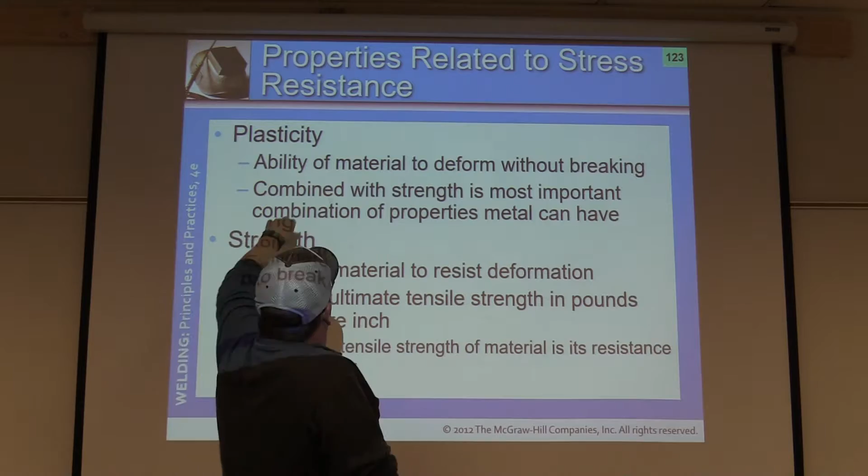Okay, we're going to come back into chapter 3, starting with plasticity. Two terms here that aren't in the book: elasticity versus plasticity. Really quick, plasticity is the ability of a material to deform without breaking. So that means it stretches, it's deformed, but it doesn't break. Just like you can draw it out like Play-Doh or putty, it'll stay in that shape, but it didn't

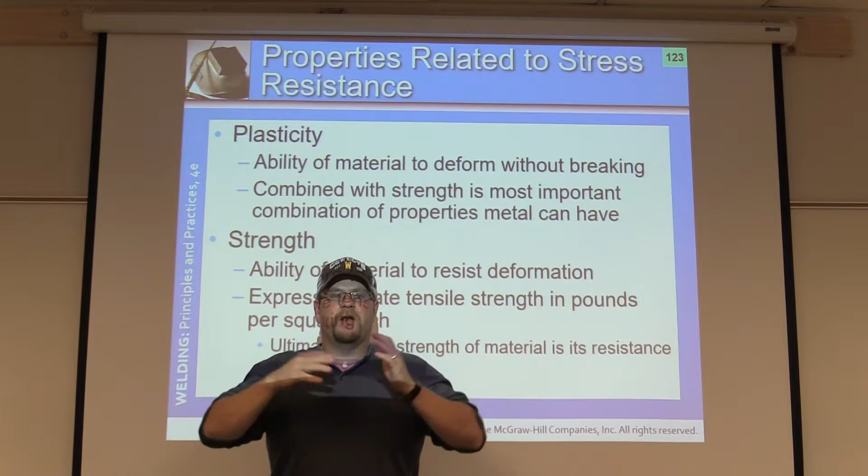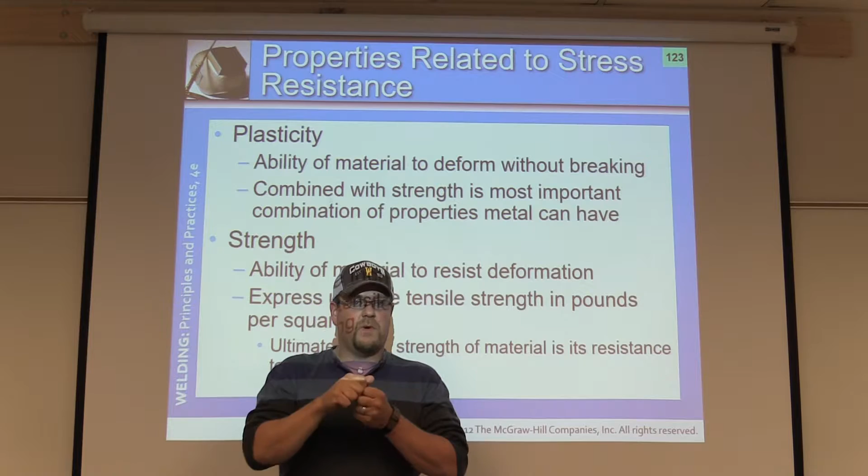break. Now elasticity is where it's like a rubber band. If you stretch it, not too far, but just within a normal distance, it will go back to its original shape. So it's elastic. It goes back to its original design. Metal has elasticity as well. A very short, linear amount, I should say, but it does have elasticity.

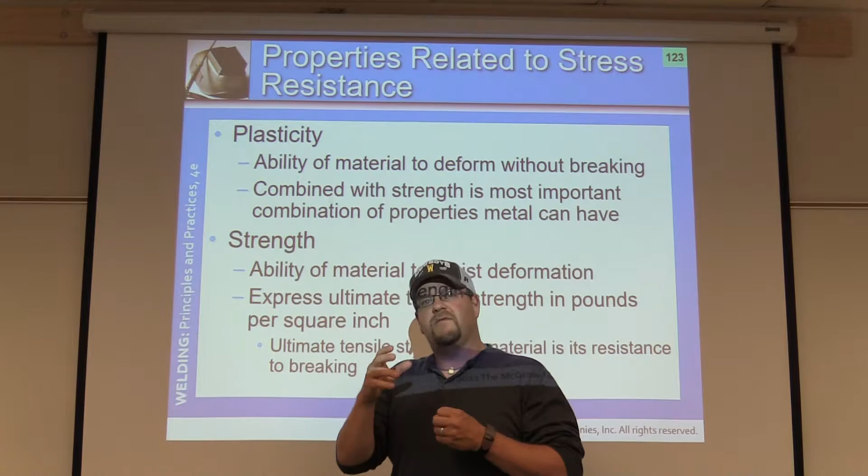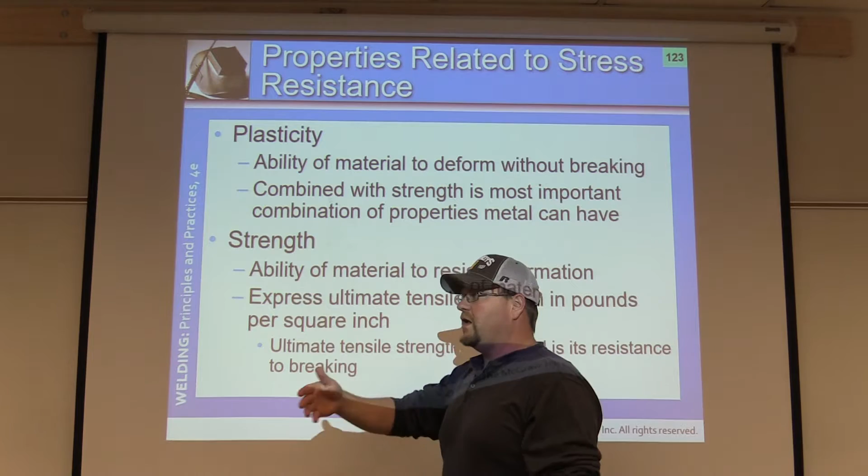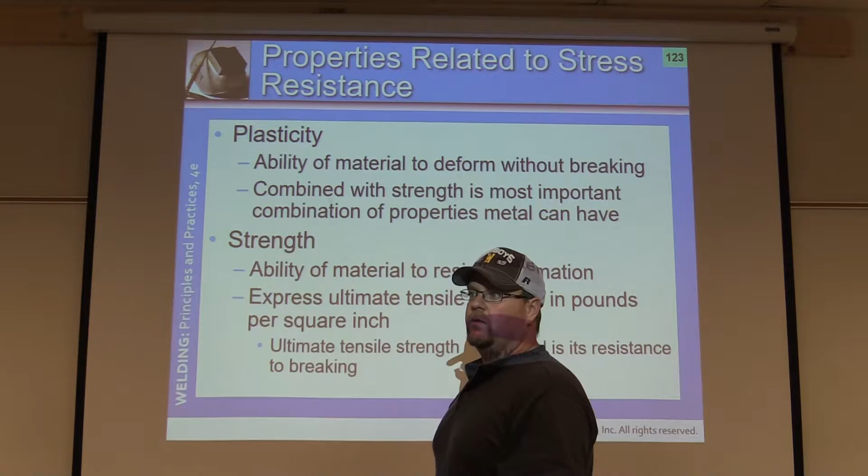Once the metal has been stretched beyond the elastic point is when it becomes plastic. So once it's deformed, now it's in the plasticity stage. It's deformed, it's not going to go back to its original shape, but it didn't just break. Most of us know you can hammer on a piece of metal and it'll indent. It can be manipulated, but it didn't just fracture or crack in half like you would with maybe an ice cube, or possibly cast iron.

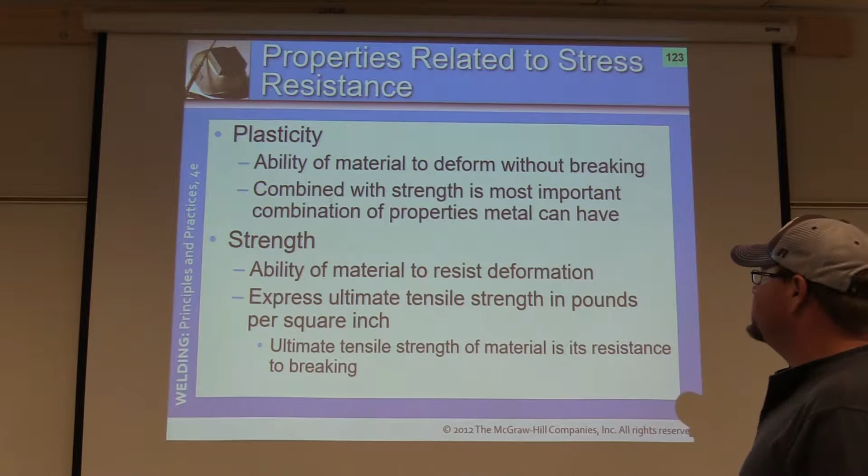Strength. It's the ability of a material to resist deformation, usually expressed in ultimate tensile strength in pounds per square inch. Strength can be to resist deformation or to carry an applied load.

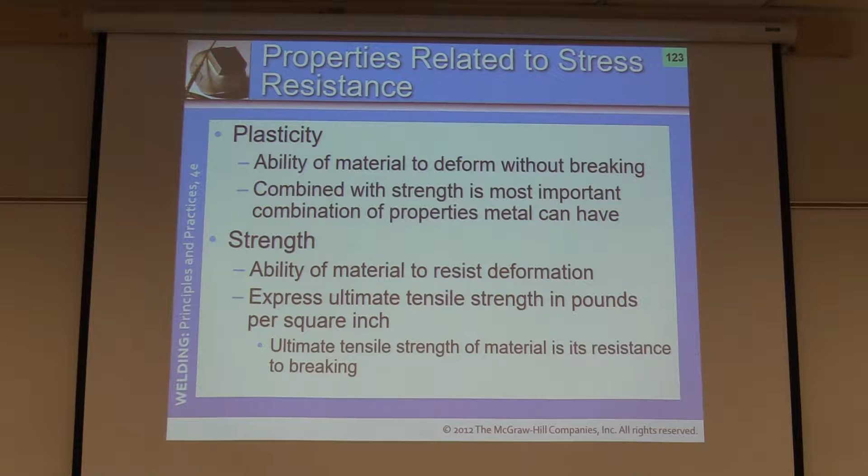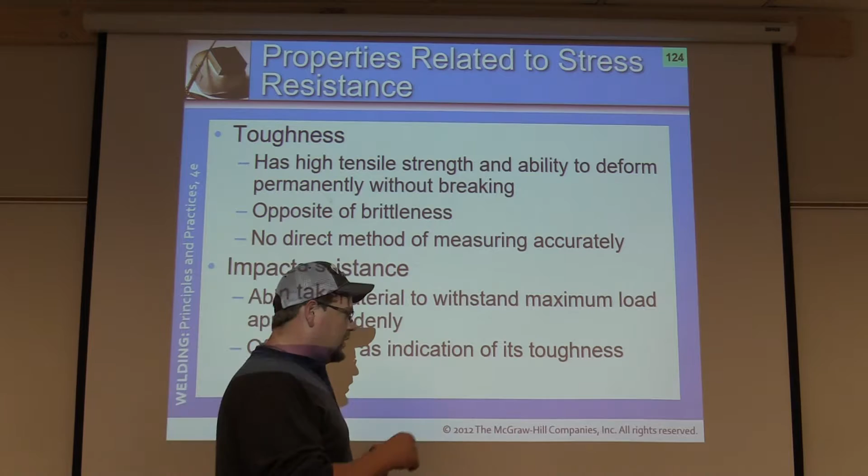Toughness. Toughness has high tensile strength and the ability to deform permanently without breaking. It's the opposite of brittleness. One way I keep toughness in mind is to think of a boxer. He can take plenty of punches, but he keeps going. He's very tough; he doesn't falter after one hit. A very brittle steel that does not have any toughness, if it takes one impact, doesn't deform, it just snaps in half and falls down.

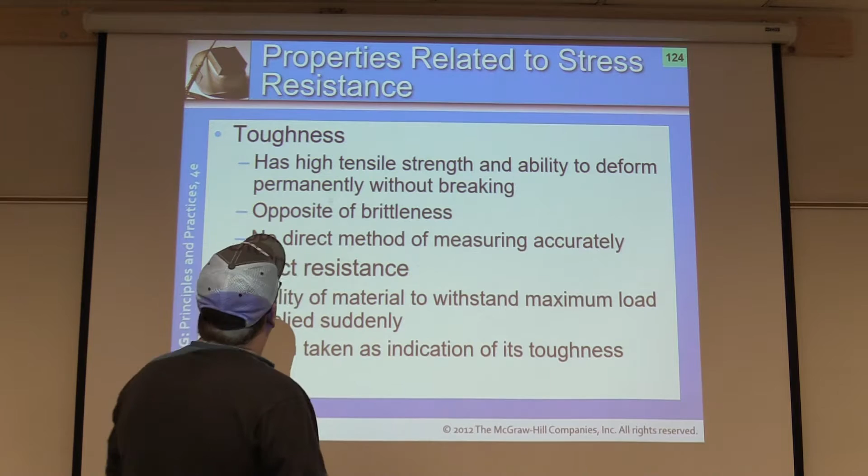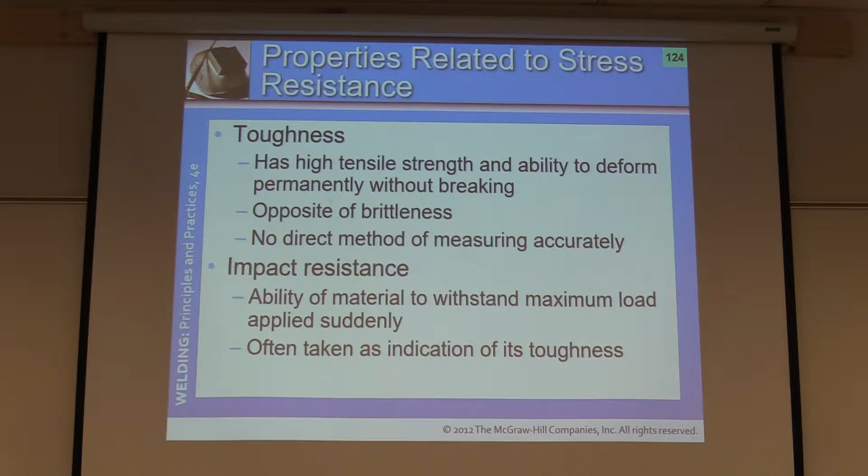Impact resistance, the ability of a material to withstand a maximum load applied suddenly. It is also usually associated with toughness. Toughness can have different values within it as well, whether it be surface conditions; if there's a notch in it, then that's notch toughness, impact strength, and so forth. Moving on, brittleness: fail without any warning such as deformation, just like we talked about, the opposite of toughness.

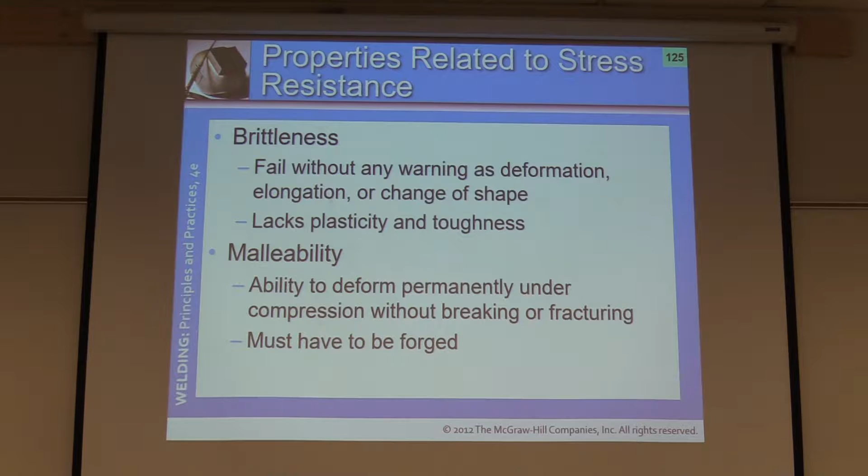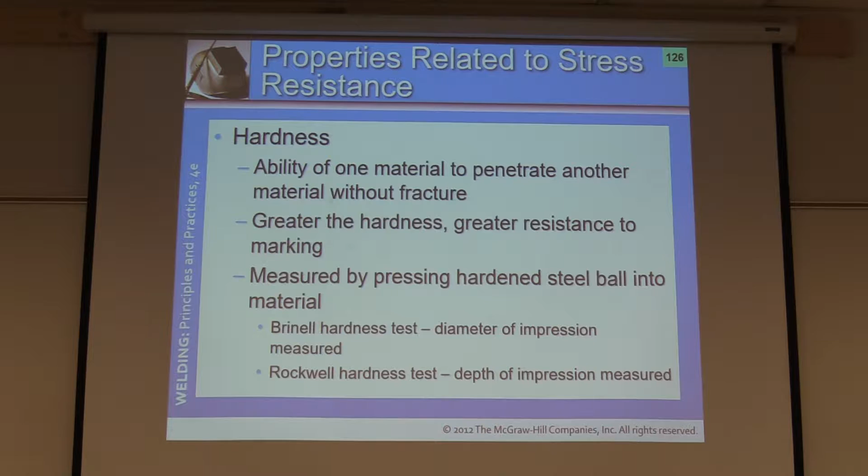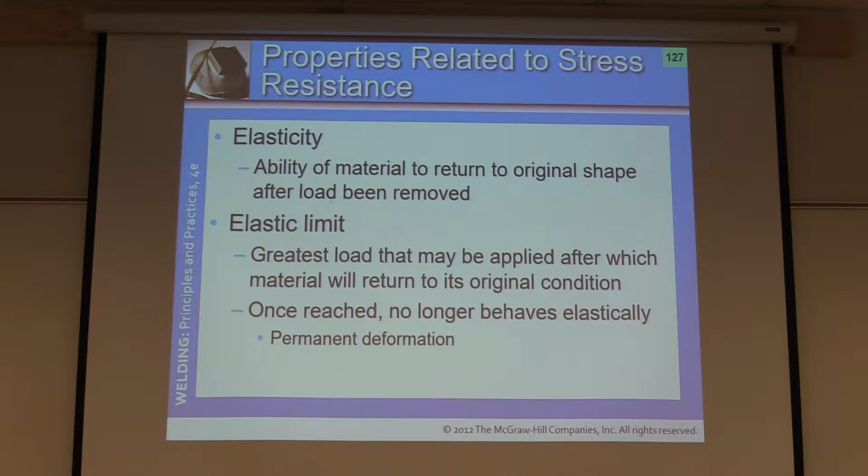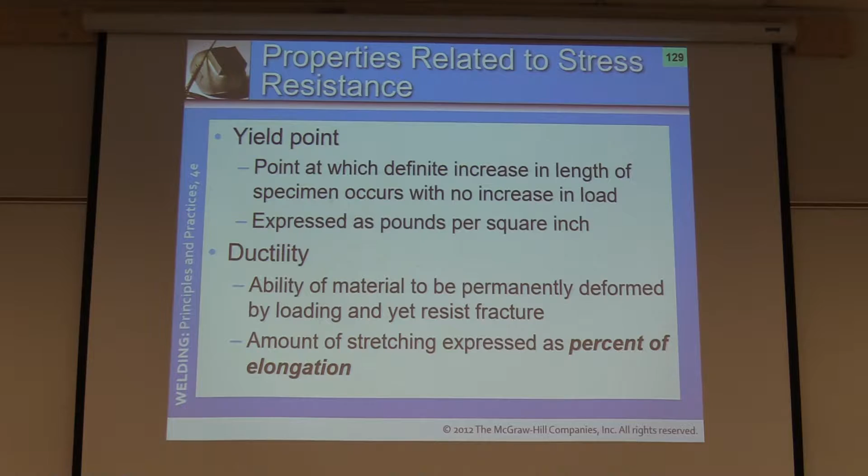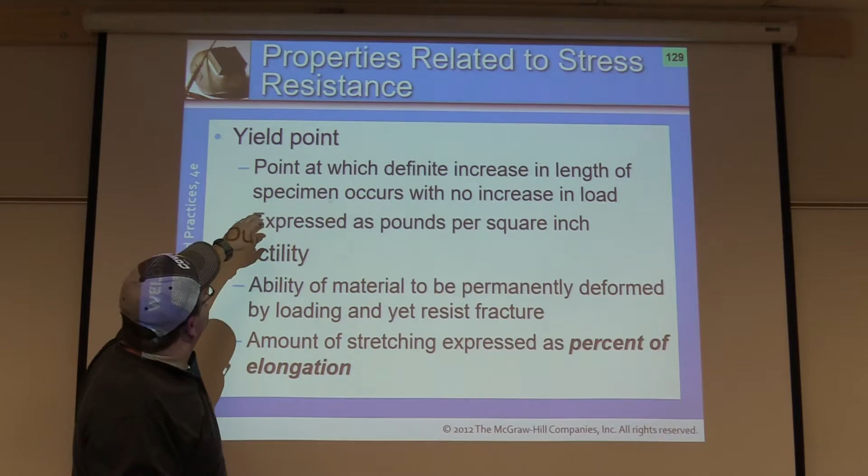We talked about elasticity and the elastic limit. The elastic limit is the greatest load that can be applied before it turns to plasticity. The modulus of elasticity is a ratio of stress to strain. Yield point is the point at which a definite increase in length of the specimen occurs with no increase in load. So the yield point is fairly comparable to the point between elastic and plastic, because it's where a definite increase in length occurs, meaning it's become deformed.

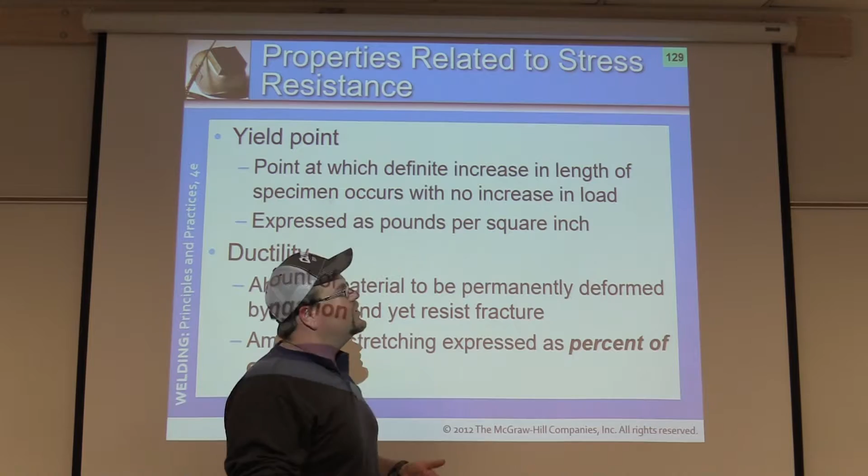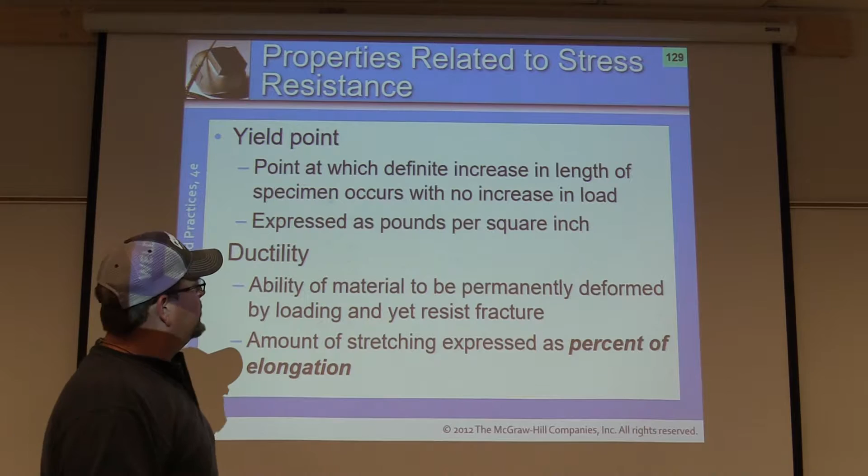So when we talk about yield point, for example, a common mild steel, A36 steel, has to have a minimum yield point of 36,000 pounds per square inch. Its tensile strength might be at 60 or 50, but it has to have a minimum yield point. So every piece they test, they take it up to 36,000 pounds, and it has to go back to its original shape with no deformation whatsoever. Ductility is the ability of a material to be permanently deformed by loading and yet resist fracture, so it doesn't break.

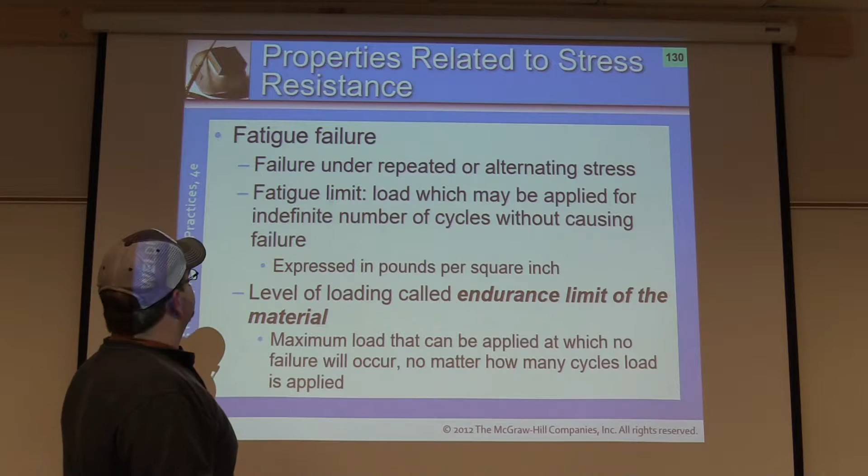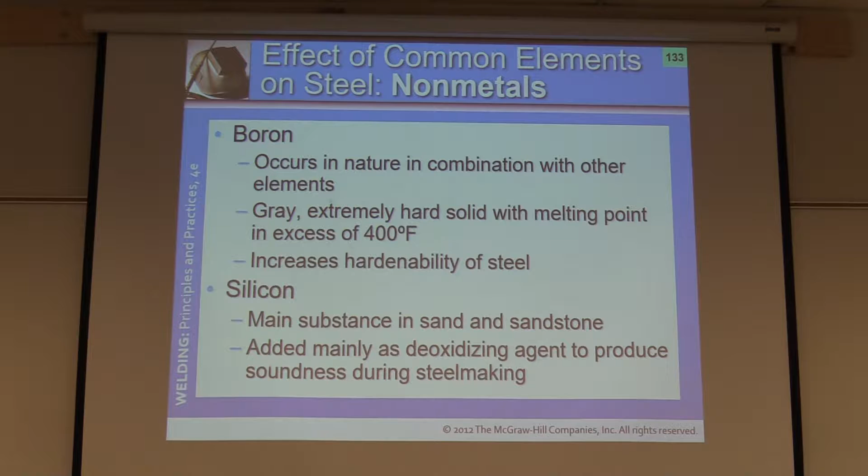Low and high carbon steel, boron, silicon, sulfur, selenium. Some of these improve the machinability of steel, increase the hardenability. Silicon is added as a deoxidizing agent to produce soundness during steel making.

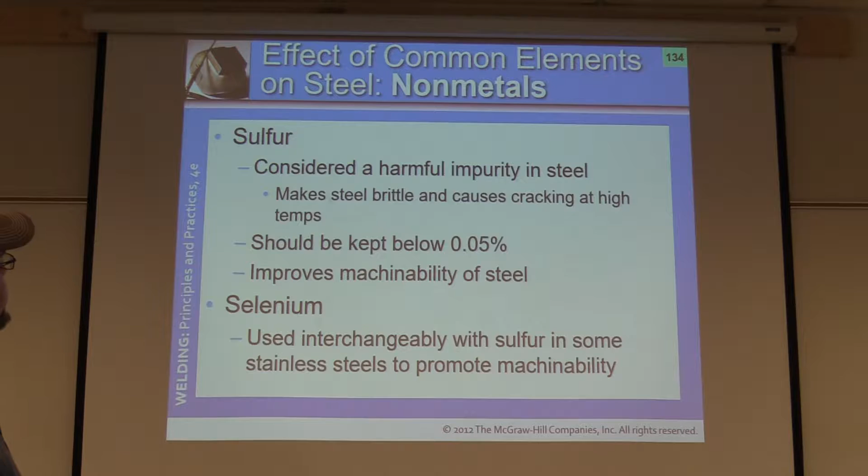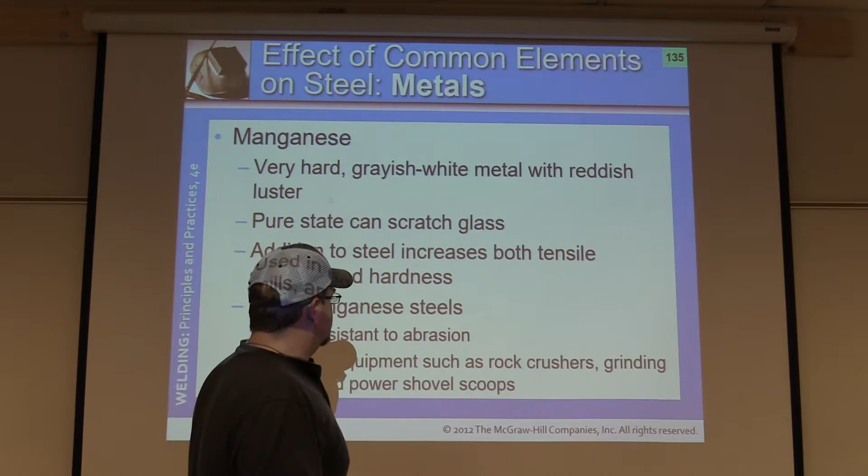Phosphorus: small amounts improve machinability of low and high carbon steel. Manganese: in the pure state it can scratch glass. It's very resistant to abrasion, used in equipment such as rock crushers, grinding mills, power shovels, scoops, and so forth—exactly what we've been talking about. There's some toughness there, right? So we can add a little bit of manganese to a normal steel, and we've increased its toughness.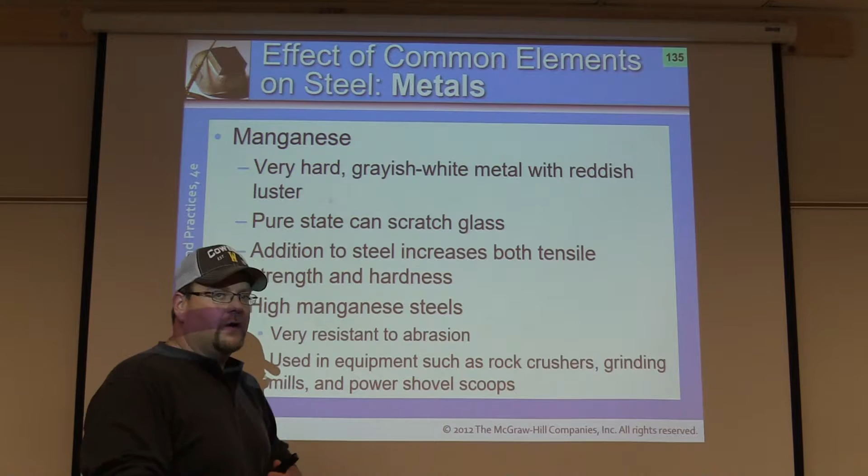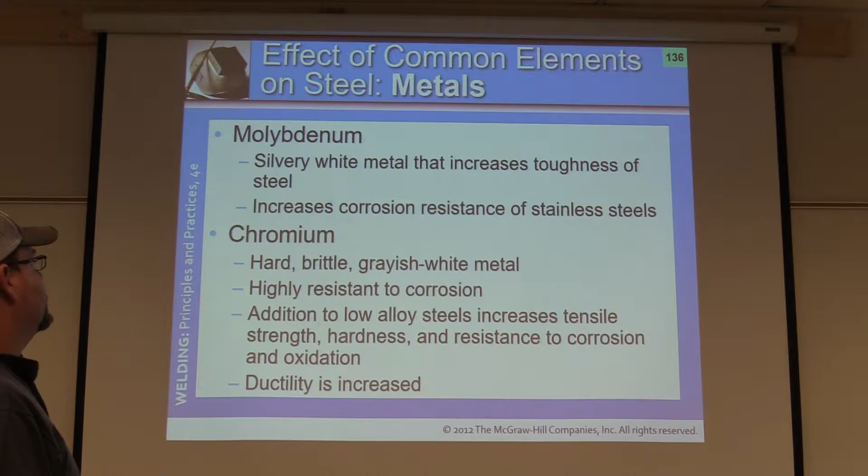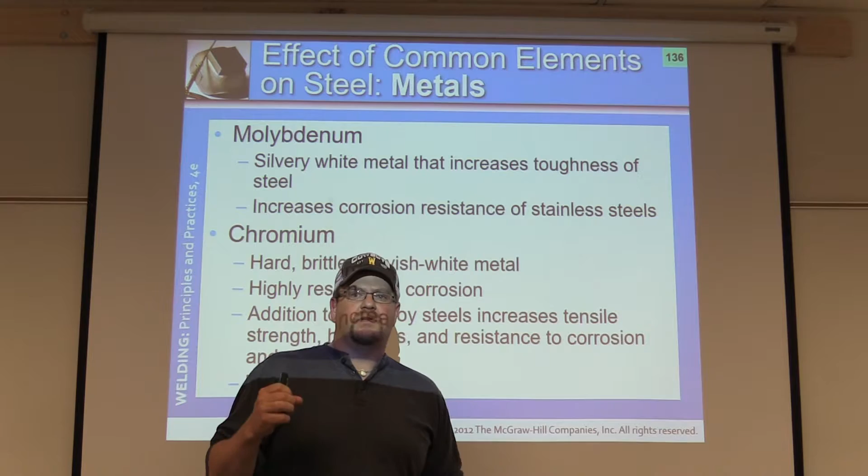Molybdenum increases the corrosion resistance of stainless steels. Chromium is known for its corrosion resistance. Stainless steels have to contain at least 12% chromium. By general standards, that's what they say—12% chromium to be a stainless steel. There are just a couple of new cases of stainless steel out there that are like 9% or 10%. However, most tests across all of the trades are going to ask you: they must contain at least what percentage of chromium to be stainless steel? The answer is 12%, okay?

Nickel increases strength, toughness, and corrosion resistance. It has very good properties, and very good cold weather properties as well—low temperature capabilities.

Cobalt, titanium, zirconium—feel free to read through these on your own.

Here's something I think most people don't realize: aluminum itself is an alloying element. It's not just its own material—it's used in carbon and alloy steels quite often. It produces a fine grain structure, can help with some corrosion resistance to normal atmospheric air as well, and has good ductility.

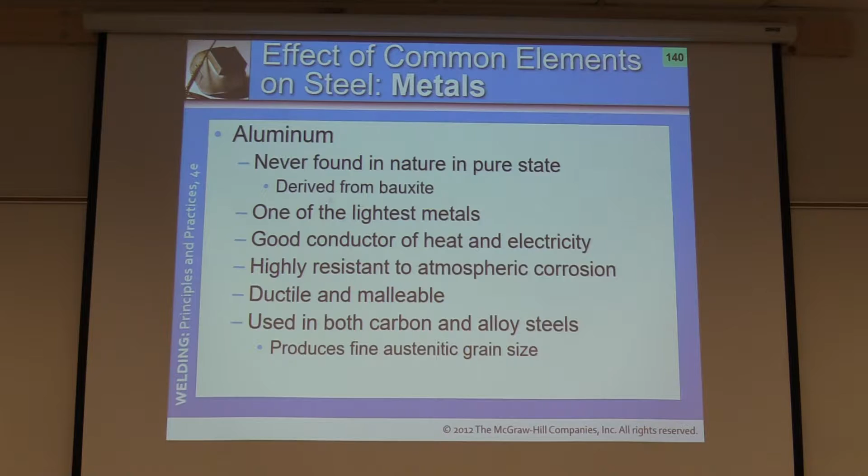Lead, and so forth. Alright, let's get into the carbon steels.

We're going to talk about 4 different types of carbon steels. We're on page 86 in the book, Types of Steel, Carbon Steel. I want you to highlight the headline of every one of these, okay? We're just going to run through the PowerPoint real quick.

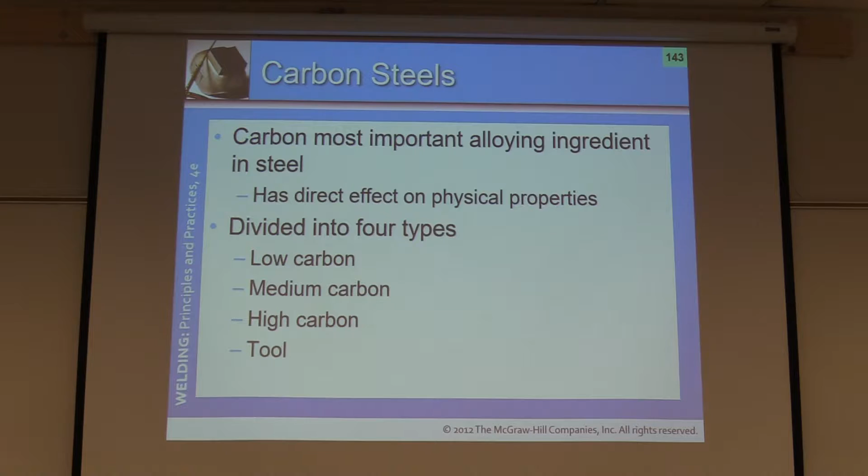Low carbon steels usually do not exceed 0.30%. They're referred to as mild steels, mild low carbon steels. Excellent weldability—most structures, bridges, ships, tanks, and pipes.

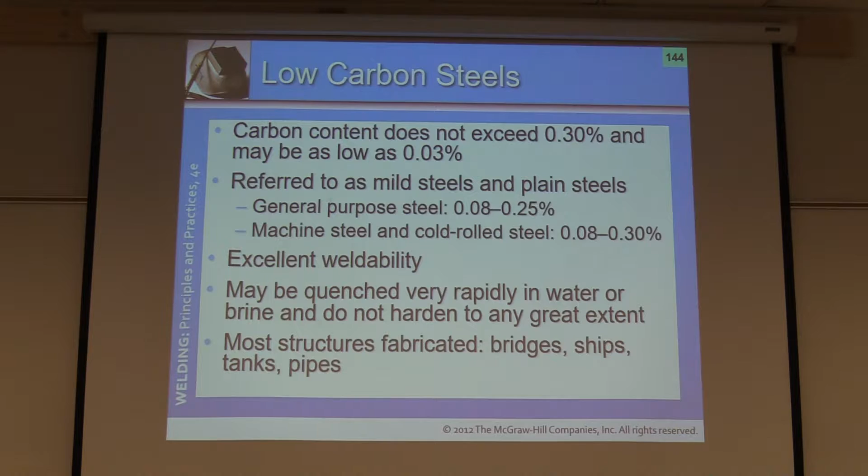Medium carbon steels usually have a carbon content ranging from 0.30% to 0.60%—so we're talking less than 1% carbon by weight. They have stronger, higher heat treating qualities, better capabilities for certain things. T1 type plate usually falls within your medium carbon steel range, for something that might see a lot of structural or vibration resistance as well.

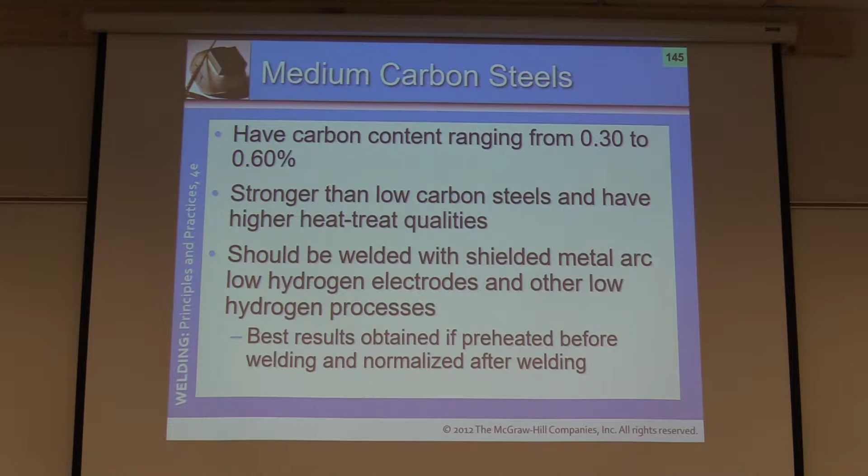If you look down here on the bottom, for medium carbon steels, best results—usually you want to preheat them, at least sweat and get the moisture out of it before you weld it, and then you can let it cool off in a normal situation, normalizing.

High carbon steels range from 0.60% to 1.7%. They can be heat treated for maximum hardness and wear resistance. They're usually used for punches, dies, tools, military tanks, and structural steel. Certain places you might have low carbon steel with high carbon steel girders or support beams within it, okay?

So again, if you're on a job, you can't just assume that everything's a low carbon steel. You should be looking, making sure that you're reading the print correctly, making sure that you are preheating, welding, post-heating, and welding with the correct filler metals and so forth, according to the percent of carbon in the steel.

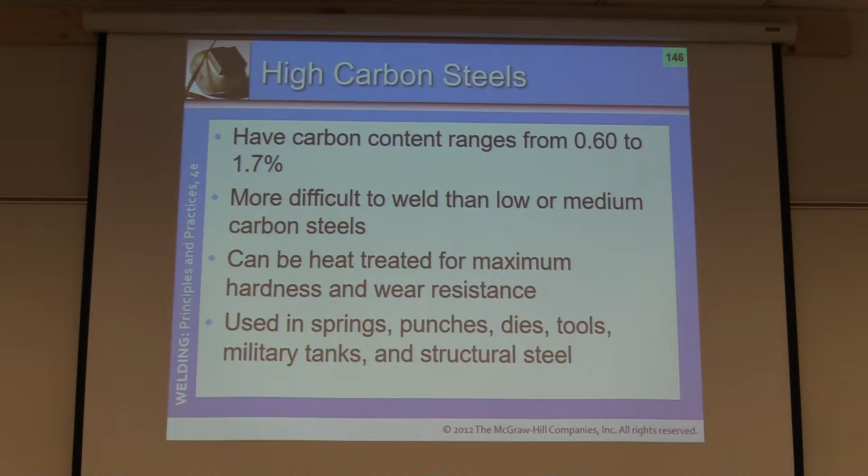Alloy steels—even normal steel is considered an alloy. However, what we're concerned with when alloying is usually steels that contain alloying elements exceeding the normal values, okay?

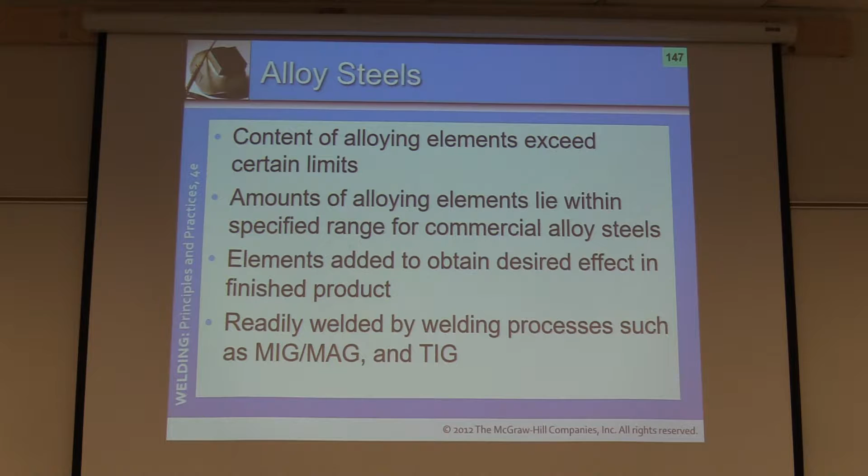High strength, low alloy steels make up a group of steels with chemical compositions specifically developed to give high physical property values and materially greater corrosion resistance than obtained from carbon steels, okay?

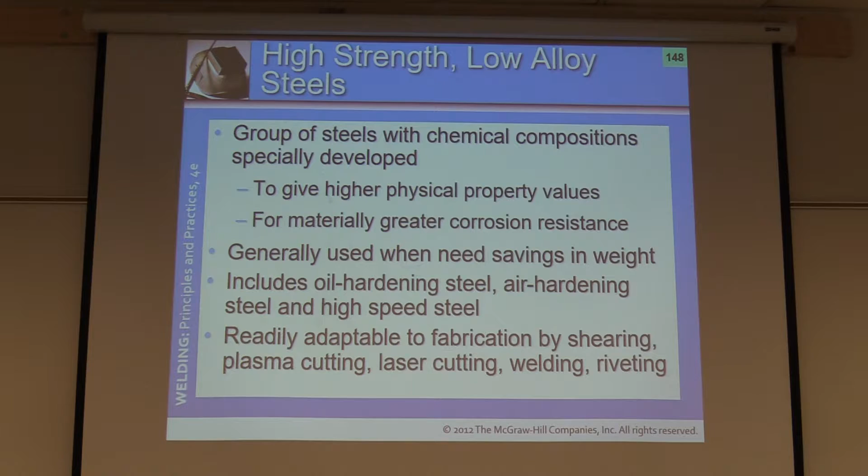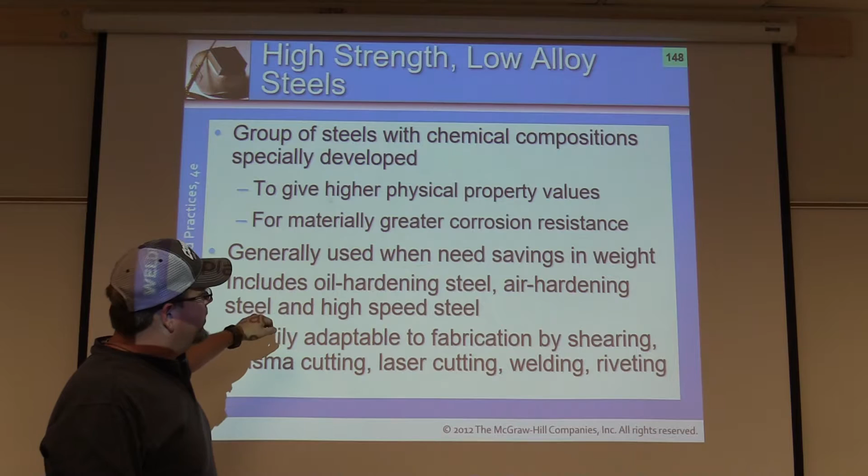Generally used when you need savings in weight: oil hardening steels, air hardening steels, high speed steels—some of our bits and so forth. You have a really good strength factor without getting into a really heavy material, and usually you're able to sharpen them better, a finer edge—they resist impact, they have greater toughness, and so forth, okay?

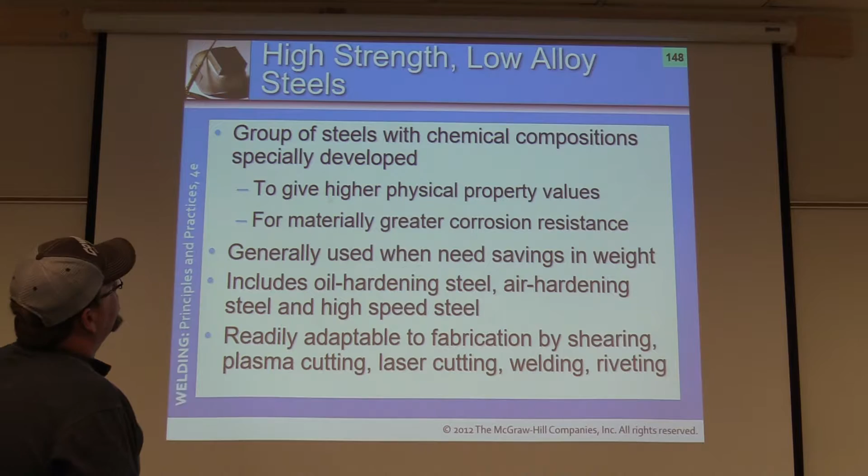A lot of times bushings are made out of high strength, low alloy steels. When you're welding these two materials together, say if you're welding a bushing inside of a mild carbon casting or mild carbon steel, usually you want to use a stainless filler metal or a high grade, preheat everything really well, and then you're either going to use 309 for dissimilar metals or a stainless steel filler metal to weld both of them up, or you would be using something like 110-18 low hydrogen with a very high tensile strength and a preheat usually of 400 to 500 degrees, okay?

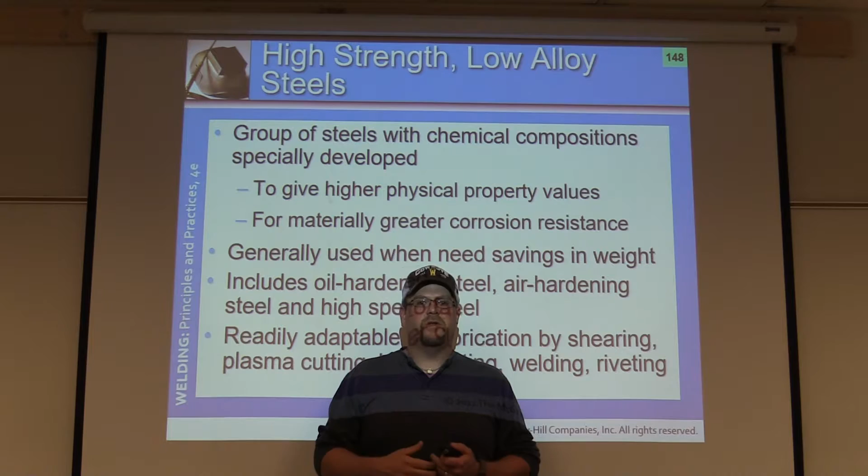Stainless and heat resisting steels. Now we're going to break down the book, and I want you to highlight a few things out of this, okay?

Out of the book, page 87, right hand column underneath stainless and heat resisting steels, let's read. As the name implies, stainless and heat resisting steels possess unusual resistance to corrosion at both normal and elevated temperatures. This superior corrosion resistance is accomplished by the addition of chromium to iron. Here's the bulleted item: the corrosion resistance of stainless steel generally increases with increasing chromium content. It appears that when chromium is present, a thin layer of chromium oxide is bonded to the surface, and this oxide prevents any further oxidization, which is the ordinary rusting in most common kinds of corrosion.

So right here it says 11.5. You will see 11.5, 12, right in that area. Most tests that I've seen have been 12% as the general guideline. And it can vary a little bit as well, but for the most part, they're not going to trick you and say is it 11.5 or 12. They usually have like 6%, 12%, 18%, and so forth, okay?

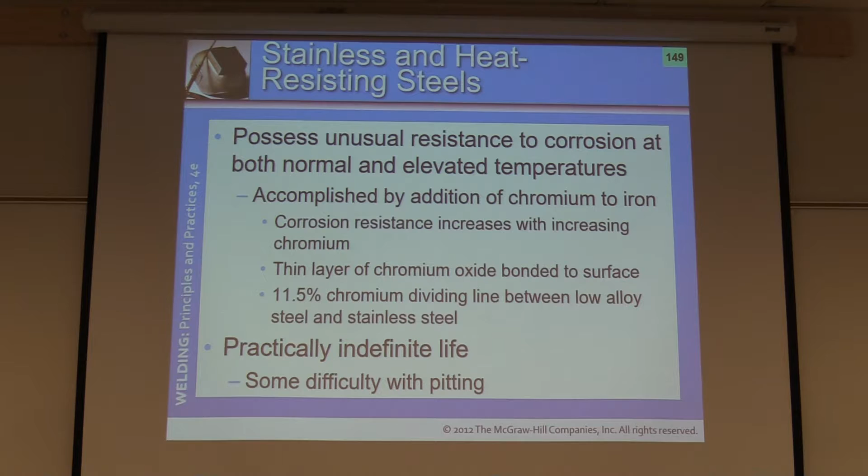Page 87, I want you to go to the right-hand column. Once you go to the very bottom, you see the two bolded items. Let's go up to the second paragraph before that, about a third of the way up from the bottom. The sentence starts out, pitting can be materially reduced.

Reading from the book: pitting can be materially reduced by treating the area with strong oxidizing agents such as some chromates or phosphates. The addition of molybdenum to austenitic nickel chrome steels also helps control pitting. So this is important if you're going to be running certain chemicals within it. Also, if it's going to be a bearing type application that's going to see more wear and abuse, it's more susceptible to pitting as well. Gears, items of that nature, okay?

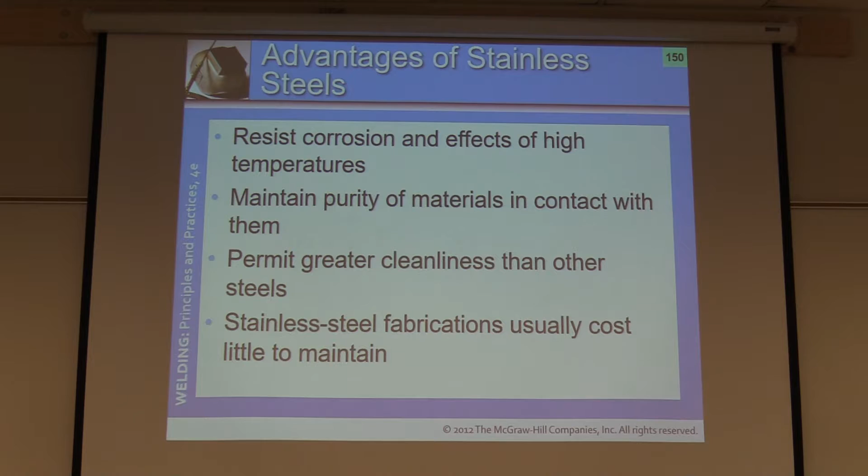So then we start into the bullet items out of your book. I would highlight all the bullet items. Okay, let's go down to the 5 classifications of steels. We're on page 88, bottom left-hand column. These are the 5 classifications. I would highlight these 5. Make sure that they're bullet items you understand.

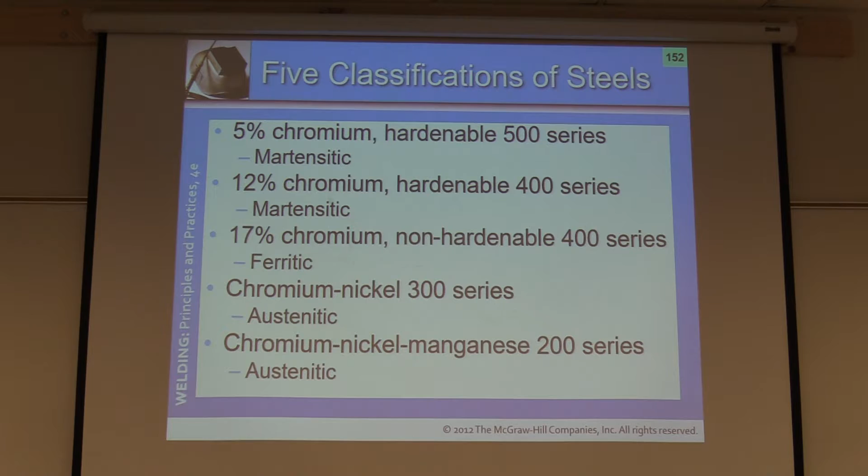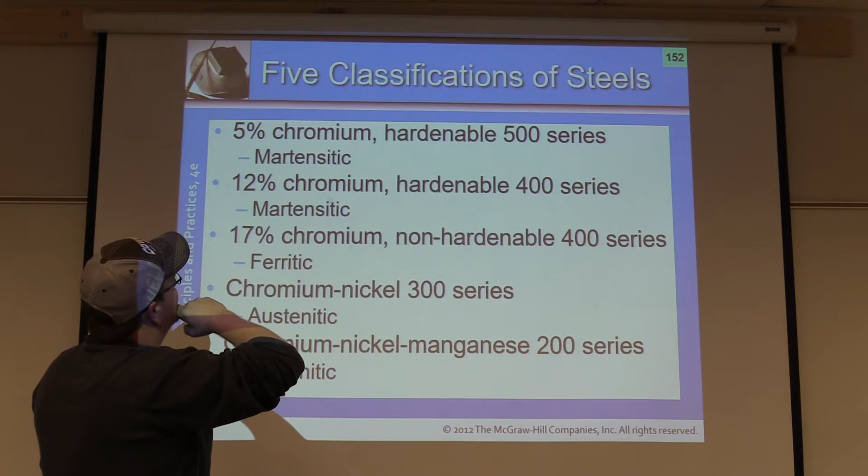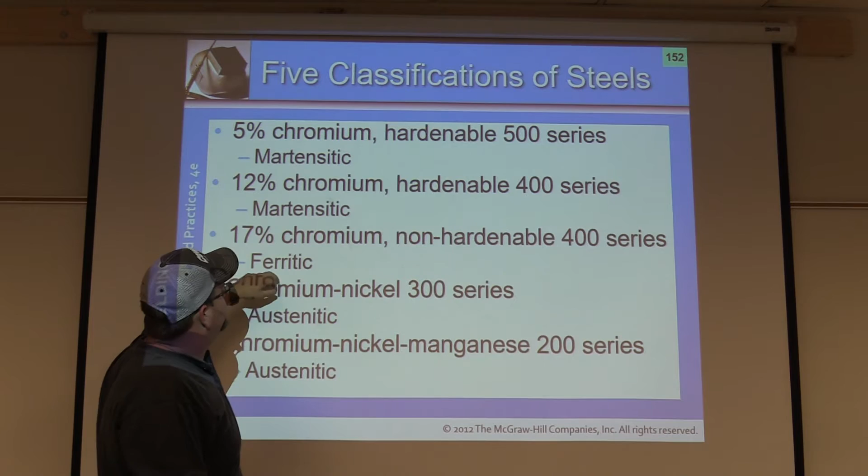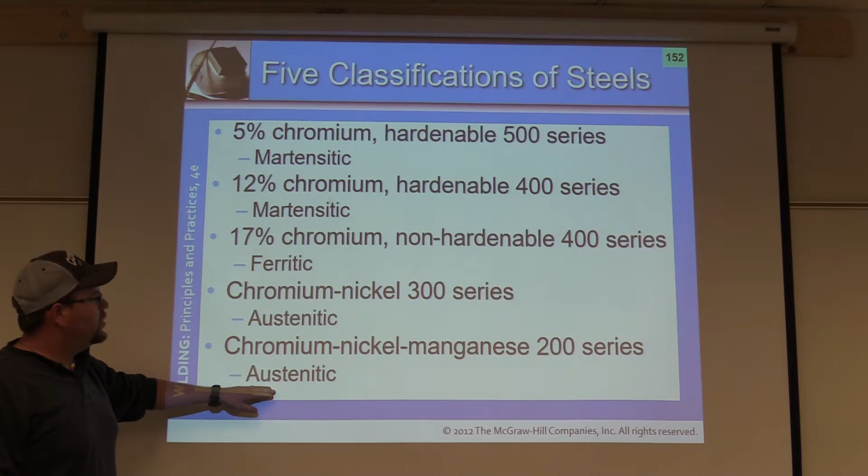The 500 series is basically what we call martensitic. Now if you look at this, here's the example that I was telling you. It's only 5%, right? There's always exceptions. I know, they give you a general rule of thumb, and then they throw something in there like that. And that's the way it is. We didn't write it; these are the standards for the whole entire nation, okay? 500 series is the 5% chromium, martensitic. 400 series is martensitic, but it's bumped up on the chromium content, so more corrosion resistance than the 500 series, okay? The 400 series is ferritic. Then you have austenitic, which is a 300 series, and then 200 series is austenitic as well. What's the difference between these? So now we've got the addition of manganese in there as well, okay?

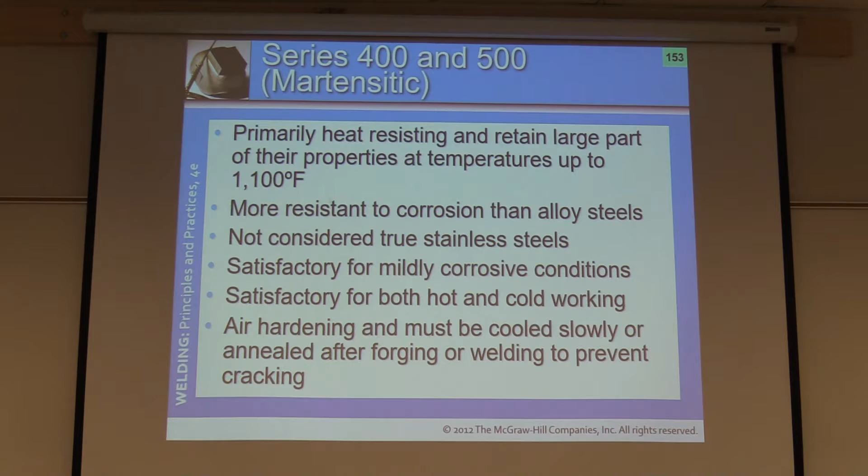So I want you to read through. Here's a 4 to 500 series of martensitic, primarily heat resisting, retain a large part of their properties up to 1100 degrees. Right here: more resistant to corrosion than alloy steels. It's not considered a true stainless steel in most applications. However, it's still a 500 series stainless steel when you go to work on it. So it can be rather confusing. Just knowing it and being aware of it, you can't change it. So we might as well just be aware of it, all right?

Air hardened, must be cooled slowly or annealed after forging or welding to prevent cracking. Highly susceptible to cracking, so you don't do a lot of it. If you do, make sure you're wrapping stuff up, using a torch to help bring it down nice and slow, or a weed burner if you don't have electric heat blankets or a furnace, and so forth, okay? 400 series, this is a good series of ferritic, so sometimes it can be magnetic, okay?

Ferritic means iron, ferrite. Chromium content is 11.5 to 27%. Carbon content is very low. There's no nickel in it. It cannot be hardened by heat treatment. The hardness may be increased by cold working it.

There's a very low coefficient of thermal expansion, so less growth. Good resistance to corrosion, fair ductility, difficult to weld.

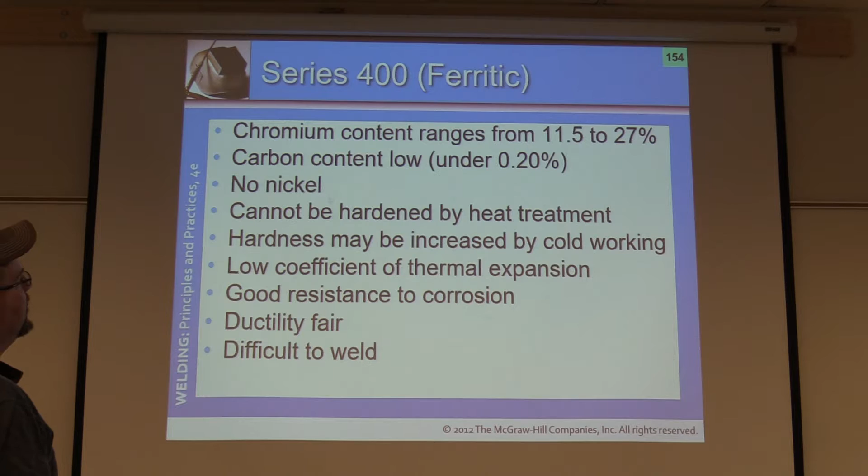200 and 300 series austenitic. Your nickel can be from 3.5 to 22%. So right here, your 400 series has no nickel. This is your 2 to 300 series, where nickel can be from 3.5 to 22%.

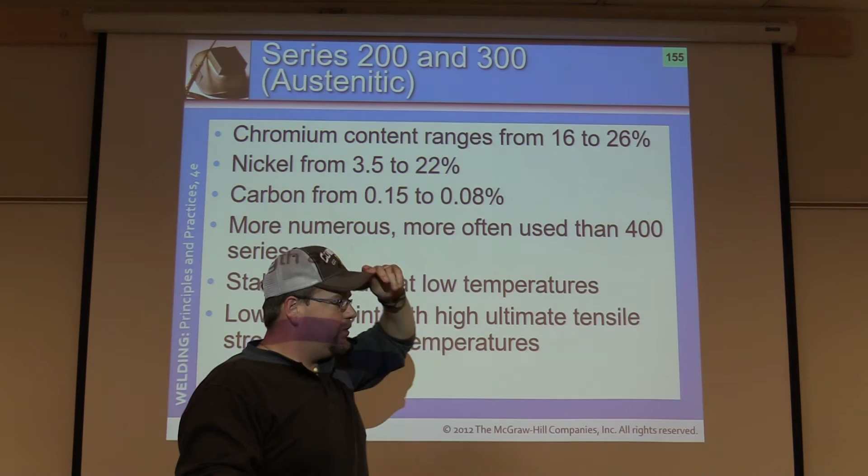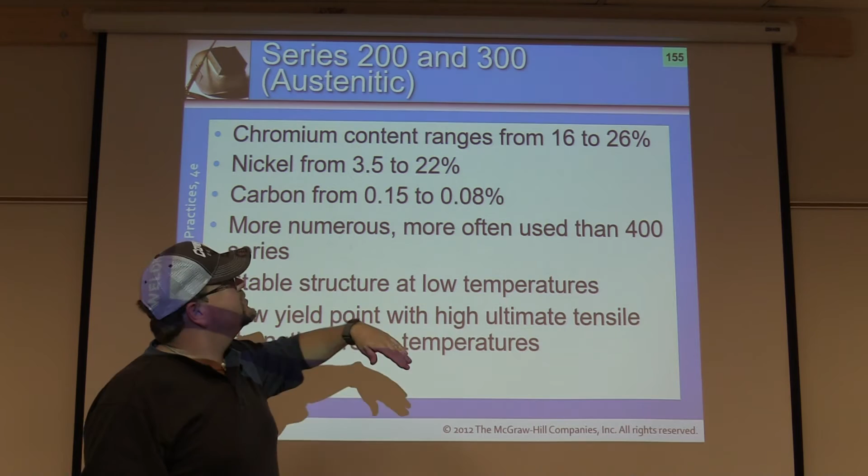Let's look at the service conditions it can be used in. I worked at a helium plant in Wyoming where we were getting down to very, very low temperatures. Nickel has great properties there, or even in the airplane industry, we want some nickel within it. It has great low temperature properties. If it's a certain grade of stainless steel where I want some corrosion resistance and nickel, this would be the type of series I'd be looking for in fabrication.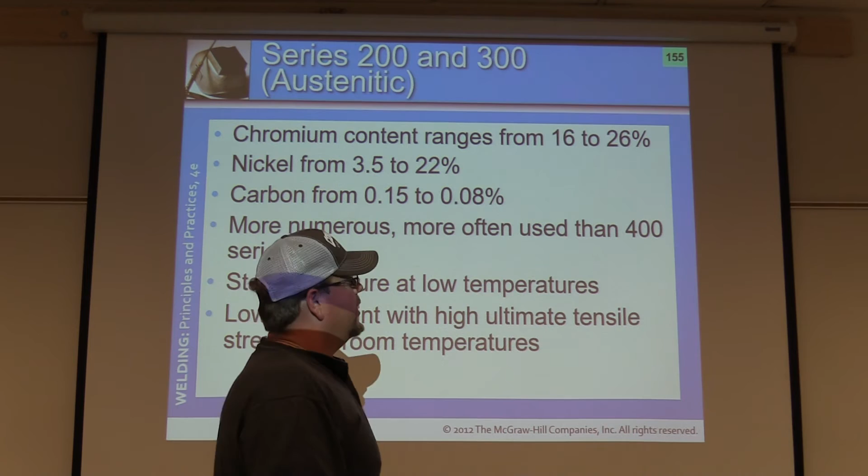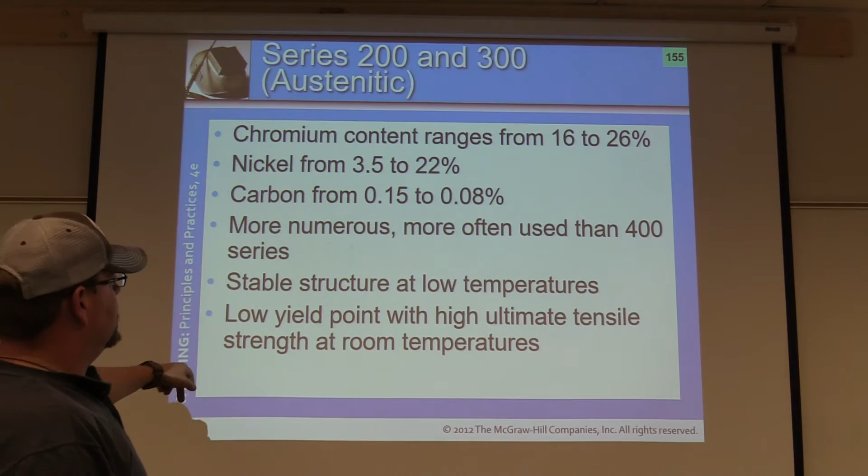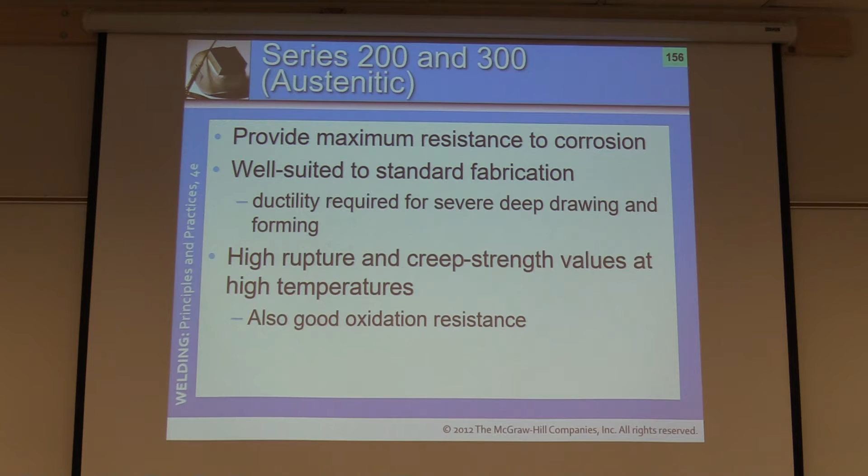Low yield point with high tensile strength at room temperatures. Stable structure at low temperatures as well, as we just talked about. Carbon is minimal. It provides maximum resistance to corrosion, high rupture and creep strength values at high temperatures, so it has good oxidation resistance.

Duplex grade stainless steels: nickel's not quite as high as the 200 and 300 series, and carbon's even lower yet. A lot of times you're seeing a chemical process come through, like in a piping system or maybe a chute system, to where it'll wear out right next to the weld pattern. We get sensitization along the weld toe. This might be the type of stainless steel we'd want to use - it has twice the yield strength of the 300 series.

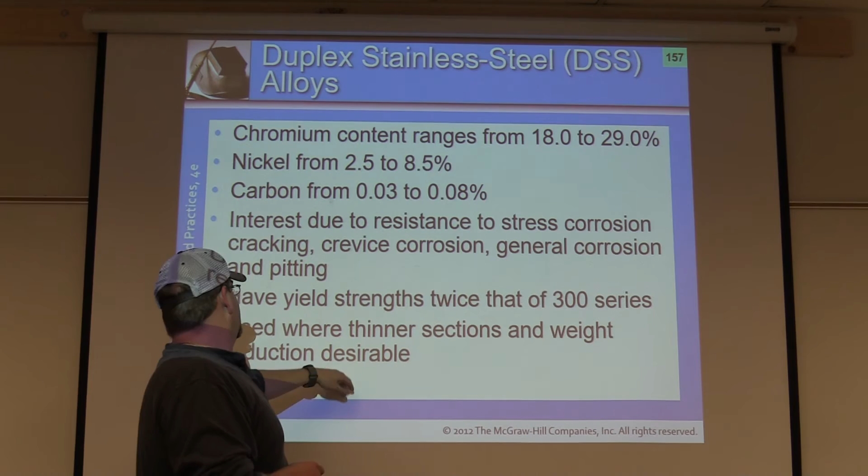So thinner sections and weight reduction must be desirable here. I've done a lot of chute work out of the duplex grade because they're strong - they can handle pressure.

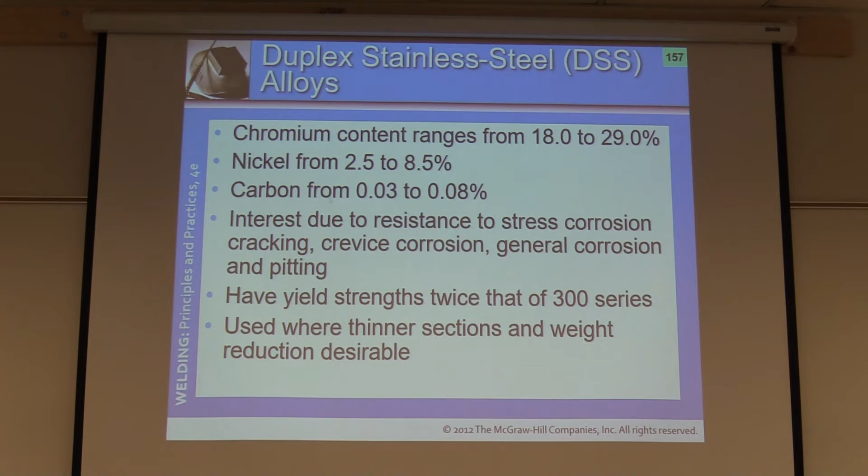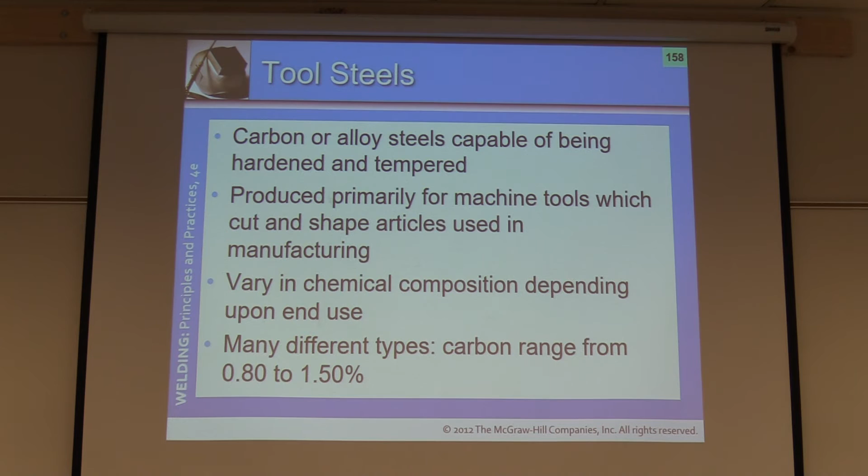Tool steels: carbon or alloy steels capable of being hardened and tempered repeatedly, produced primarily for machine tools which cut and shape articles used in manufacturing. They have varying chemical composition depending upon the end use. Carbon ranges usually from 0.8% up to 1.5% - that's pretty hard, getting close to that cast iron range.

They're rarely welded, and must be preheated to do so.

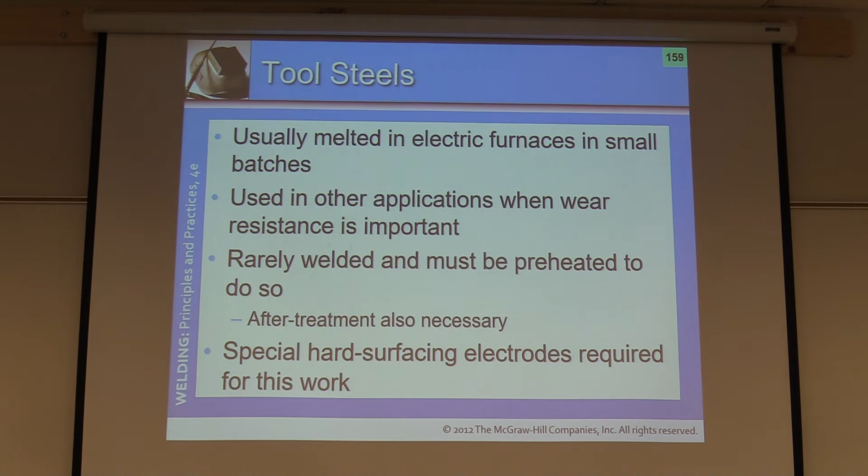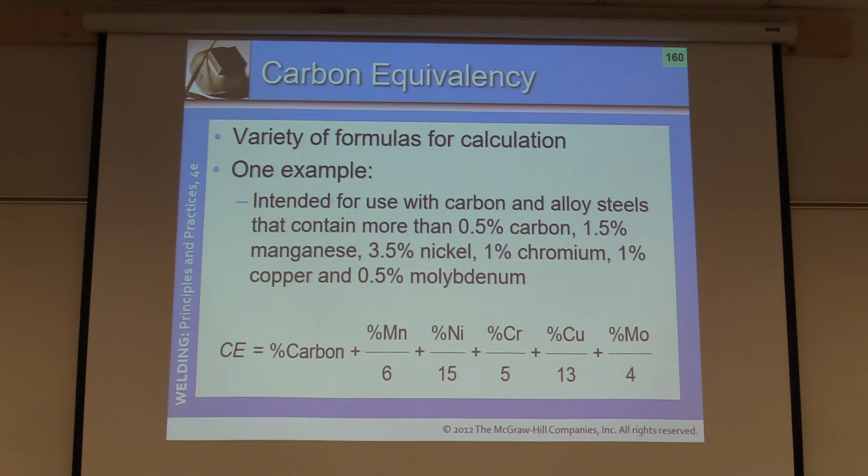Carbon equivalency - you might see a question like this on your test. Basically this tells you it's intended as a variety of formulas for calculating what the equivalency for carbon is, intended for use with carbon and alloy steels that contain more than 0.5% carbon, 1.5% manganese, 3.5% nickel, and so forth.

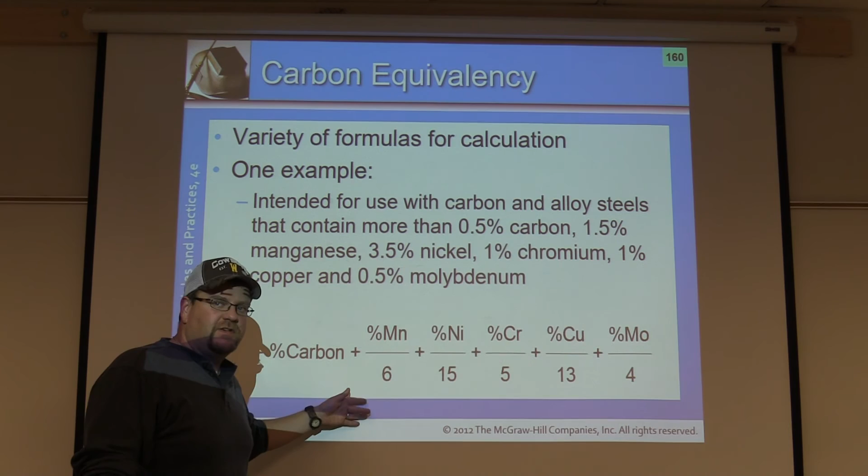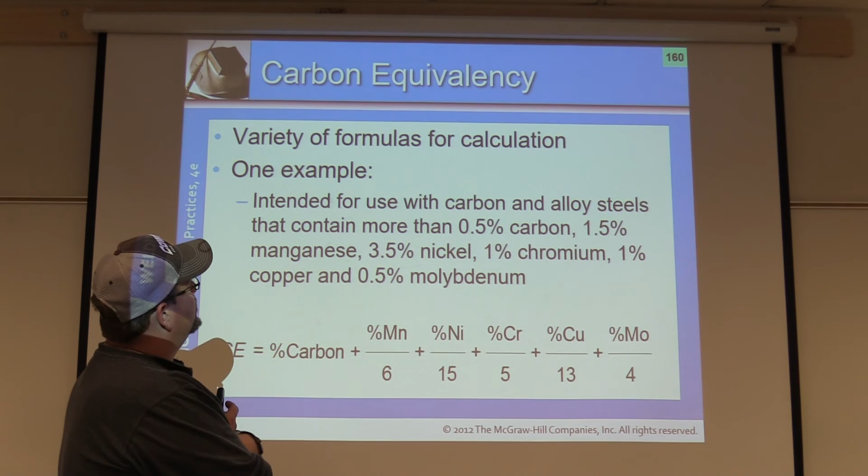Occasionally you might see this, very seldom. Around here in Central Oregon we have a very broad range of manufacturing facilities, some really specialty shops - again, you don't want to ever limit yourself. Just be aware of what it is. We will give you the values and so forth, and you can work through it on your own.

American Iron and Steel Institute steel numbering system, based on the chemical analysis of steel - number designations indicating the percent of predominant alloying element.

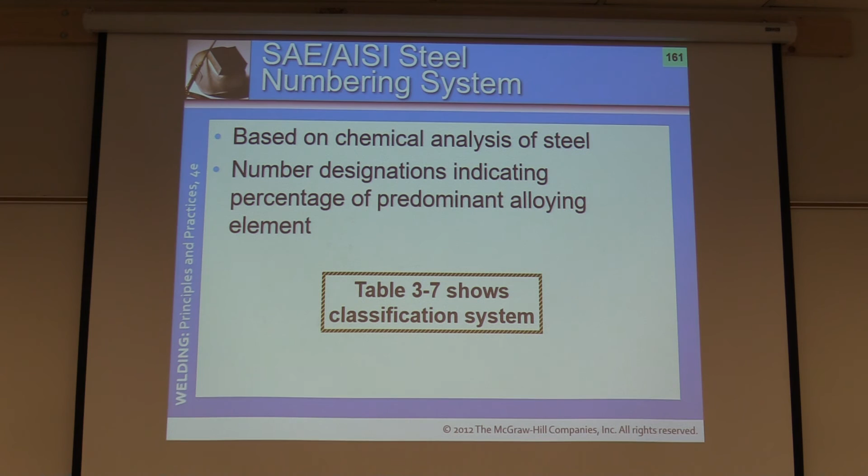Table 3.7 shows you the first digit of the numbering system. Table 3.7 is on page 92.

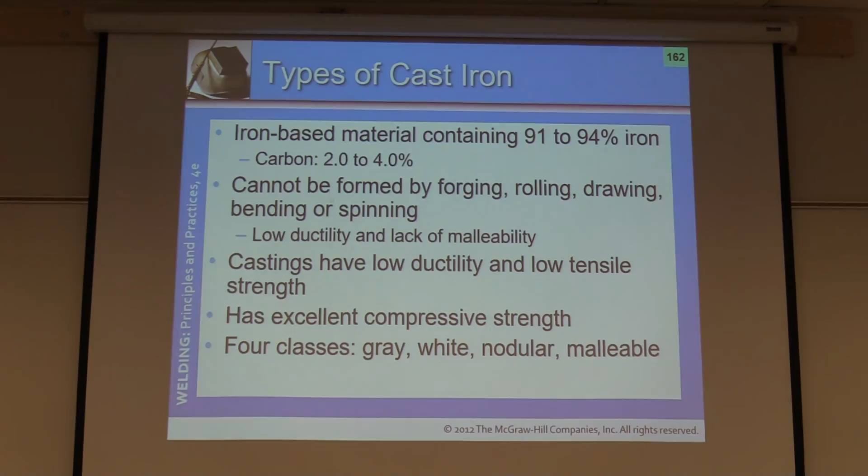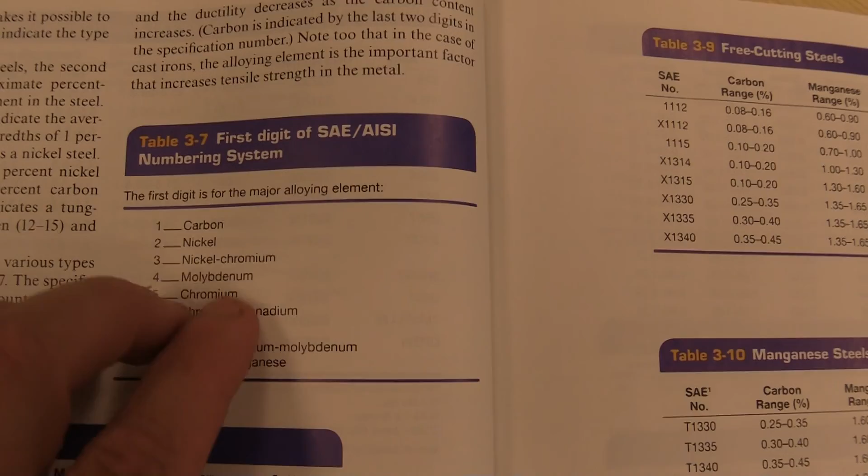I want to talk a little bit more about this. I want you to look back through the other tables as well - they talk about ferritic stainless steels, martensitic, austenitic, and so forth. I'm going to pull this off and we're going to look at the book real quick. There's a few things I really want to talk about with the numbering system specifically here. The first digit is the major alloying element - carbon, nickel, all the way down to 9. To begin with, these are carbon steels - you notice the first digit.